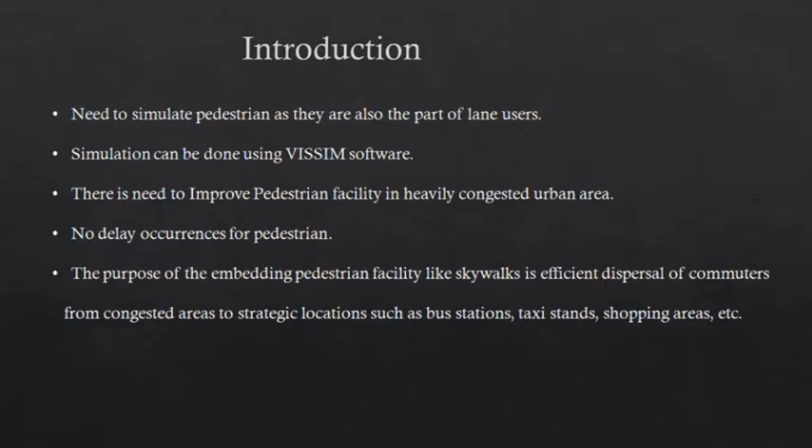Problem statement: I'll not consume much time. These are heavy congestions, and due to pedestrian and vehicle interaction, pedestrians feel anxiety while crossing from one lane to another. So considering all these situations, there must be some provision of pedestrian facilities.

Objectives are there, the same objectives.

Sir, can I skip all these? Go ahead, as you like. This is your presentation, we don't object. Whatever you want to do.

First, I carried out the feasibility study of pedestrian facilities in urban areas. After that, I collected data on traffic and pedestrians, including vehicle parameters and pedestrian parameters on the existing selected area, to analyze the delay occurring to pedestrians as well as vehicles, and to show the real life situation of vehicle and pedestrian interaction, and suggest remedial measures to reduce obstructions to pedestrians. All this was done with the VISSIM software.

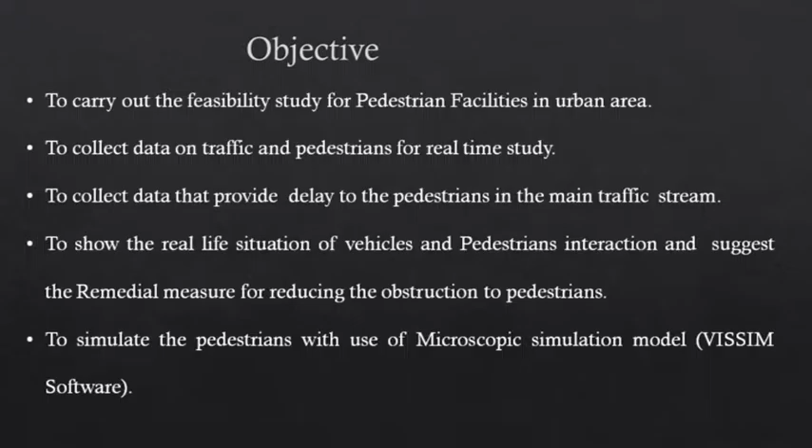I manipulated the real life data, the real scenario data, and collaborated it with the simulated data which I did in the VISSIM software. These are the scope: comparing the real life situation to the simulated one, and suggesting improvements for pedestrian facility and design based on the results obtained through simulation.

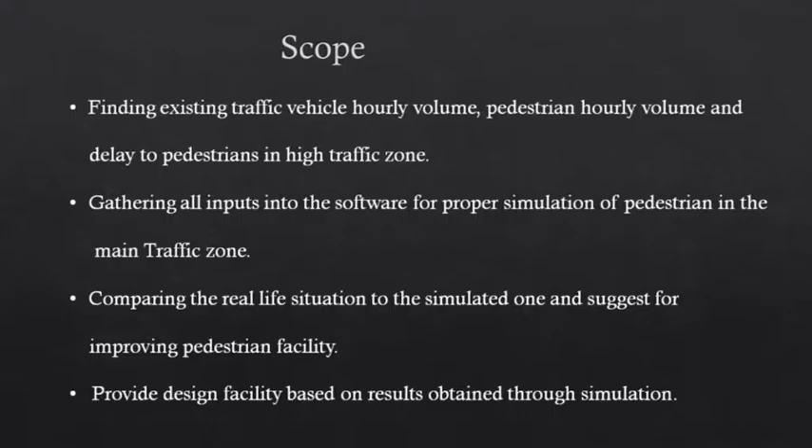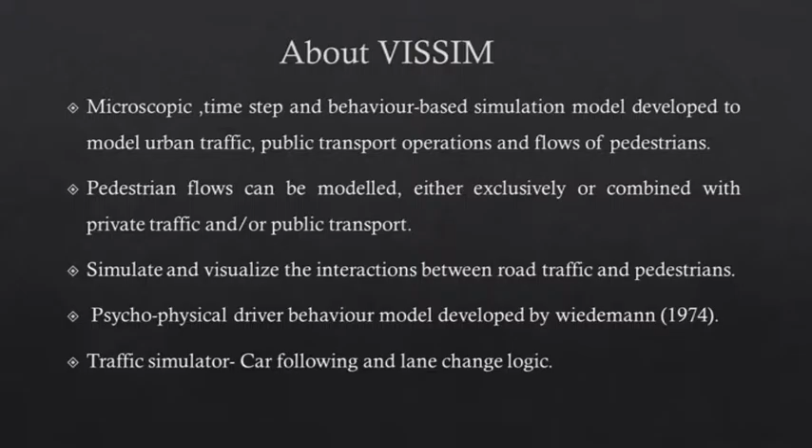This is what VISSIM is about. It is a kind of microscopic behavior-based simulation model which can model urban traffic or public transportation. That's what is discussed here.

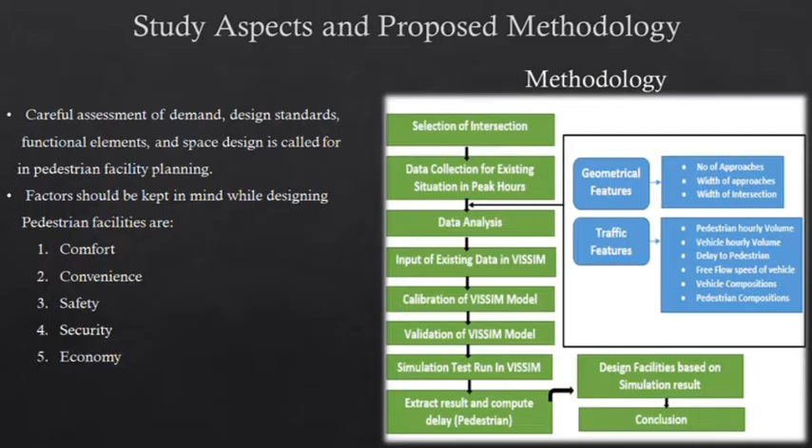Literature review. My methodology, I'm skipping the same. This methodology, I think, is the same procedure you carry out.

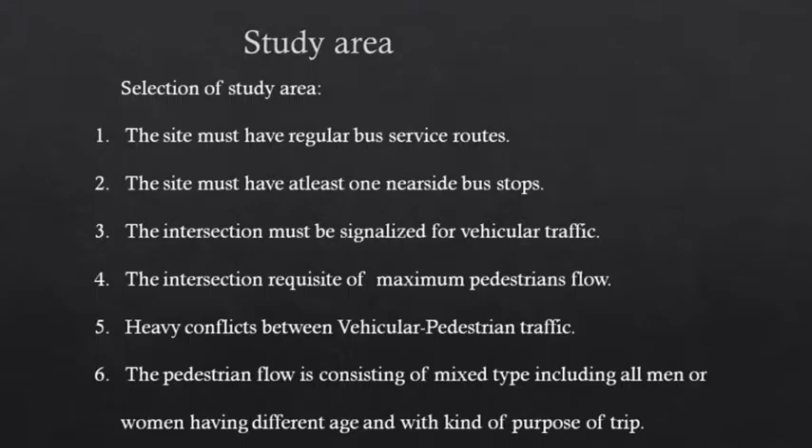My study area is like that: the site must have regular bus service routes, the site must have at least one nearside bus stops, the intersection must be signalized for vehicular traffic, the intersection must have maximum pedestrian flow, heavy conflicts between vehicular and pedestrian traffic, and pedestrian flow consisting of mixed types, including all men and women, all pedestrian types.

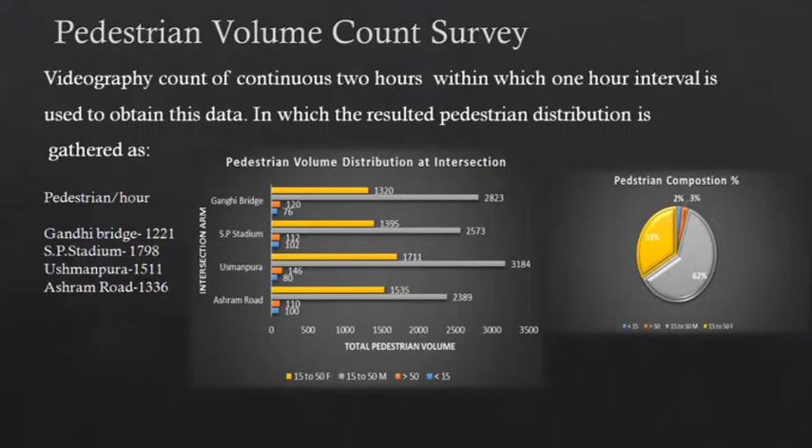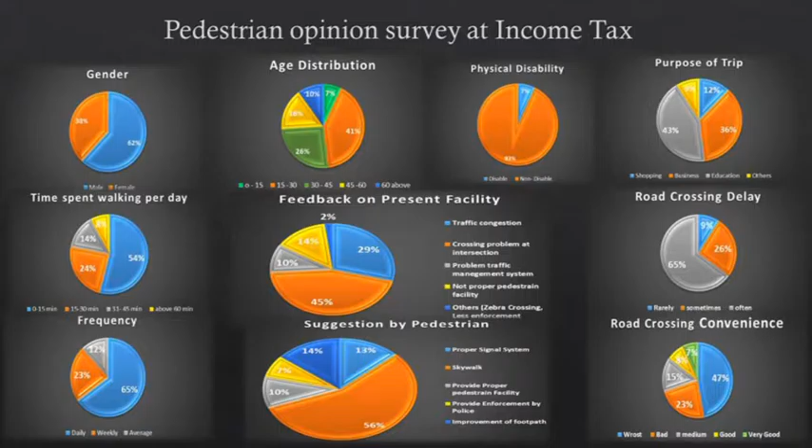This is another section which I studied, like Kalupur railway station. Everyone is aware of this. It is a kind of mid-block section.

In between, the pedestrians are crossing the lane. It is the biggest and busiest railway station within Gujarat, so the number of passengers using this area daily is associated with transport interchanges in their vicinity.

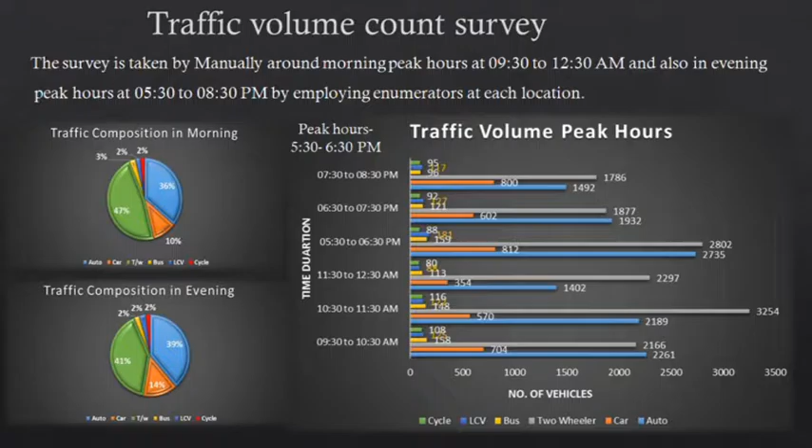The problem is further aggravated by the presence of hawkers and parked vehicles, making the commute hazardous for pedestrians. So for that I conducted surveys: traffic volume count survey, pedestrian volume count survey, road inventory, and the same approach field measurement.

After collection of that data, I went to the IRC provision. The same, Manraj sir has conveyed to us that two control sections of facility are there: at-grade pedestrian crossing and grade separated crossing. So here are some of what can be called warrants.

Peak hour volume of pedestrians: PV square is greater than 2 into 10 to the 8. According to my conducted survey, it is observed that 7.9 into 10 to the 11 is the frequency. So this one warrant is agreed.

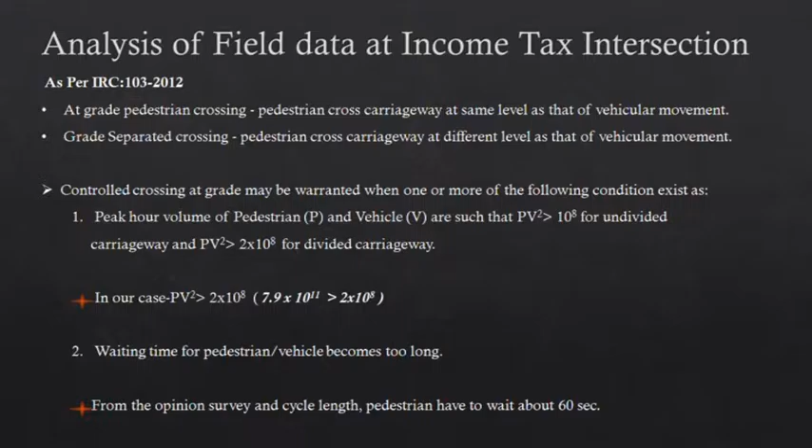Waiting time of pedestrian and vehicle becomes too long, same as I supposed to face. Accident records indicate 5 - this is the total provision in IRC 103/2012. From my past accident record, it is more than 5 injuries, and approach speed of vehicles exceeds 65 km/h.

Taking these two into consideration, the control measure usually adopted in this case is to provide a traffic signal with an exclusive pedestrian phase. So I have provided the pedestrian phase at the junction and also in the Kalupur mid-block junction.

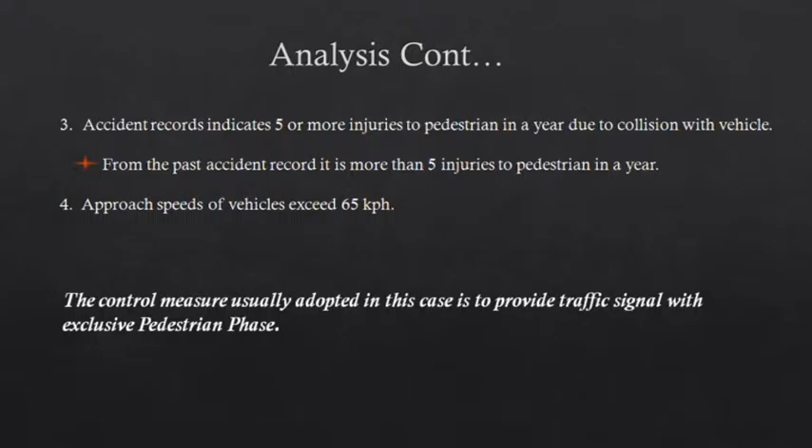That is what I calculated manually. This is the delay I found. This delay cost pedestrian unit flow is 22.08 pedestrians per minute.

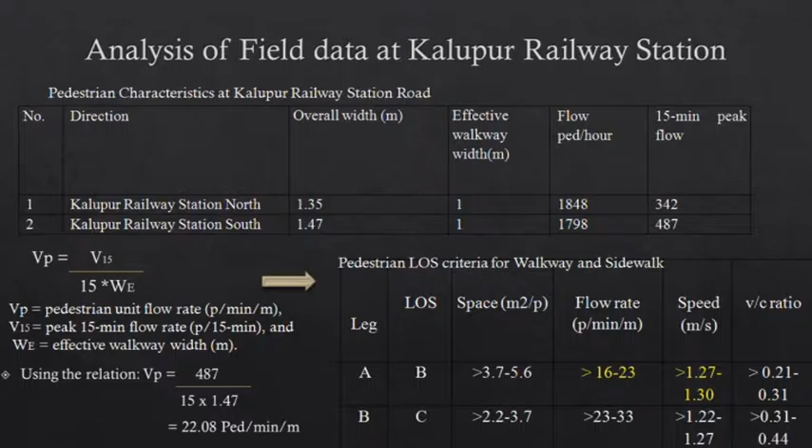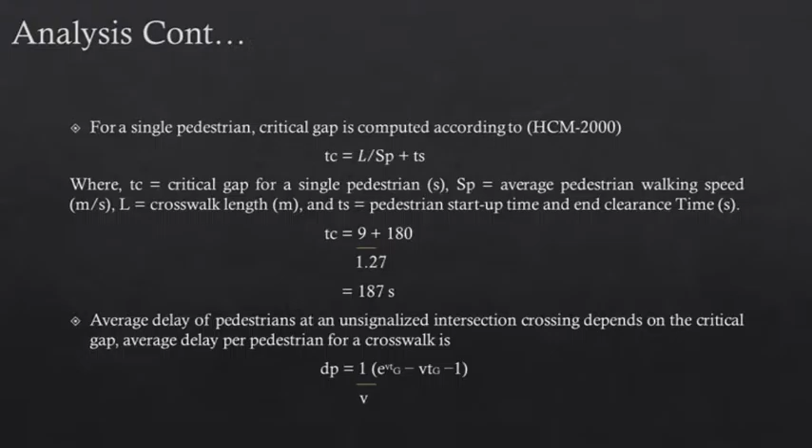This is the LOS criteria for walkway and sidewalk, which I went through. Finally I found manually the single pedestrian gap, that is 187 seconds. Same, what I got as level of service is F, which is very high.

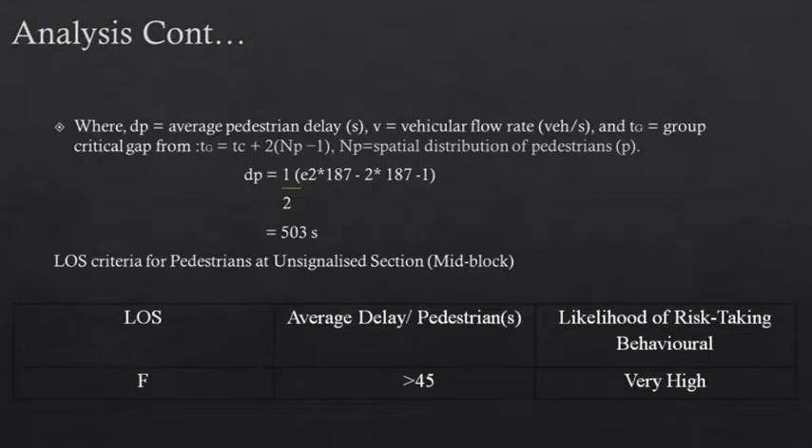So accordingly, I suggest that I modeled it in the simulation. This is an Income Tax intersection 2D, a glimpse of 2D, and this is a glimpse of 3D which I have modeled at the junction.

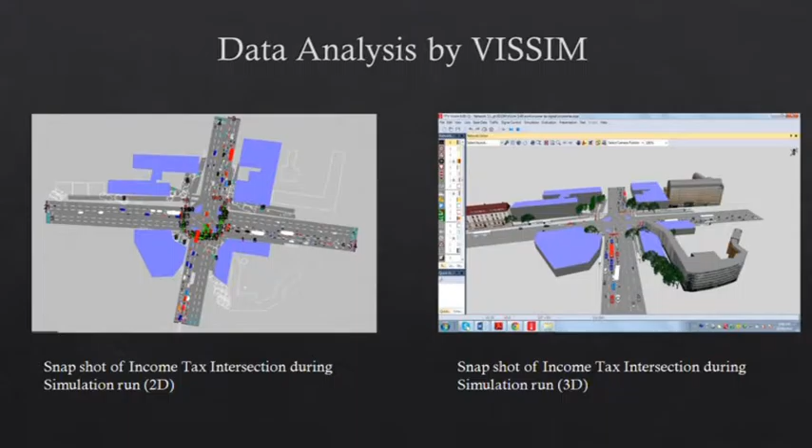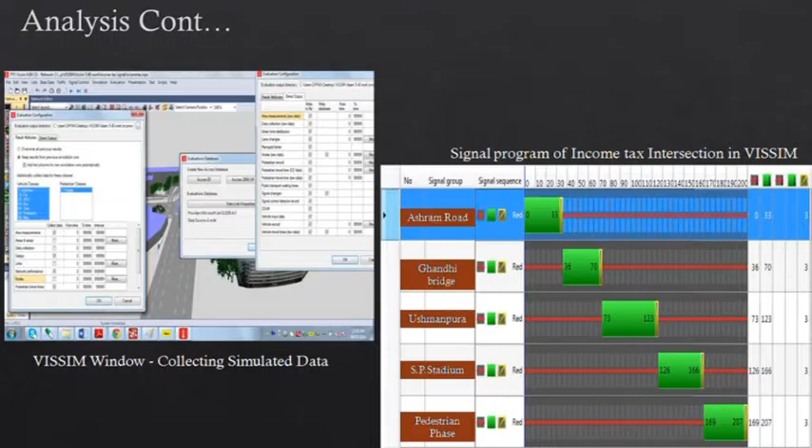This is one video, I'll show it. Will the video work?

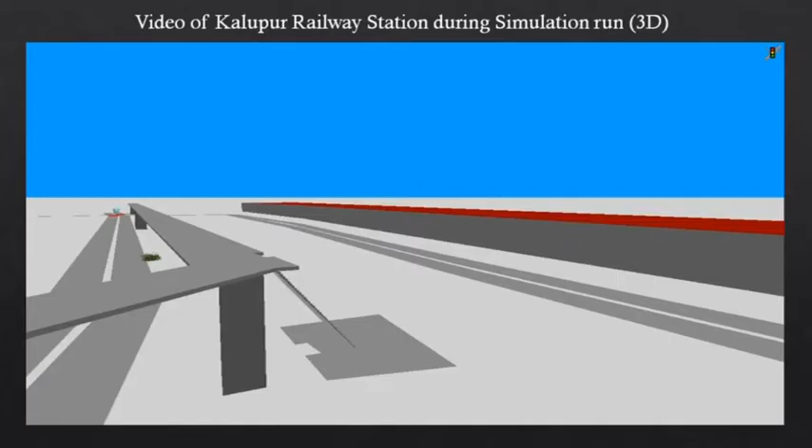My analysis shows that at Income Tax intersection, the actual delay, the real-time data delay, is 44 seconds, and after simulation it will go down to 36 seconds.

And at Kalupur junction, 503 seconds is the actual delay, and after simulating by providing a skywalk there, it becomes 0.8, which is a kind of negligible value.

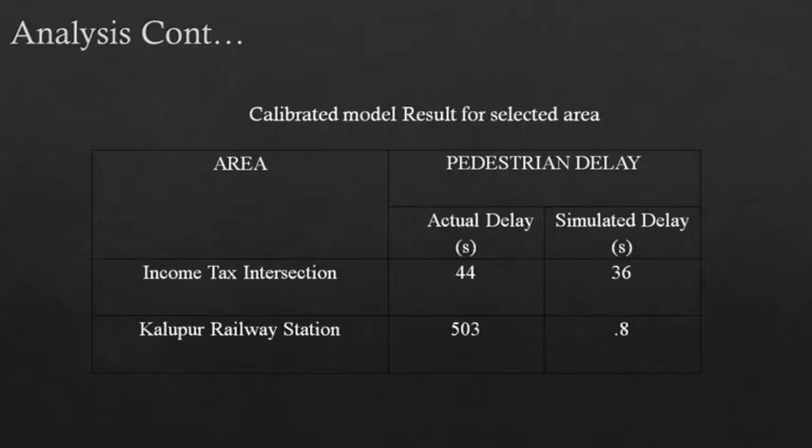So for that, I went through the warrants given in our codal provisions: that the volume of pedestrian and vehicular traffic is so large that insertion of an exclusive pedestrian phase will increase the cycle time for traffic signals beyond 120 seconds.

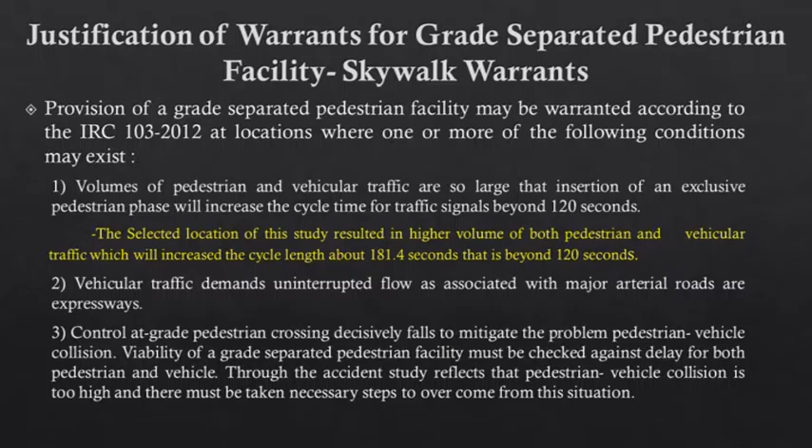In my data, the cycle length is about 181.4 seconds, which is very high even for vehicles. So I have prepared a skywalk for that, and accordingly given the design parameters.

These are the design parameters at the junction of the intersection. This is the run process after providing the skywalk at the junction.

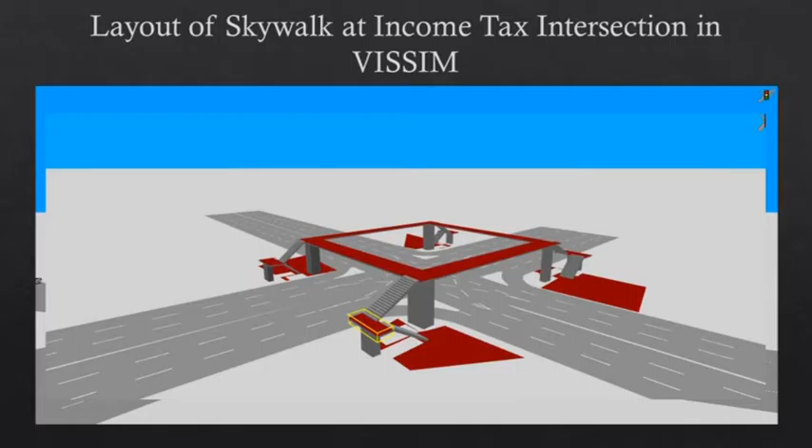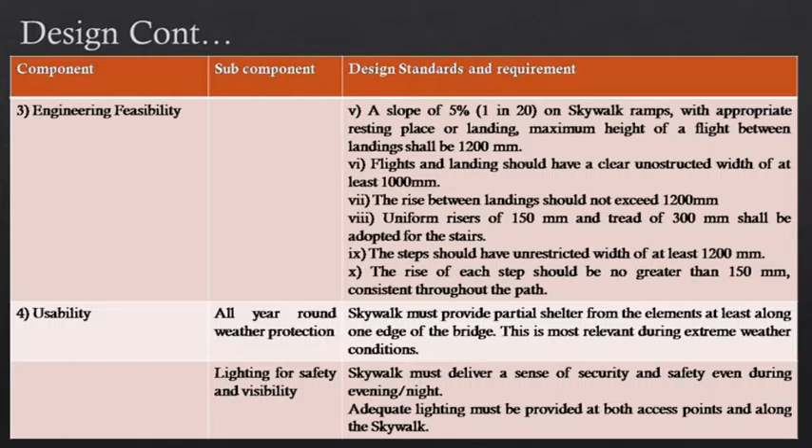Same for Kalupur railway station, I went through the justification for design criteria, like that.

Conclusions are the same: the study is concluded worthfully, and for the stretch of mid-block at Kalupur railway station, the simulation comes to 0.8 second, which is negligible, clearly representing that after providing a skywalk across Kalupur railway station, pedestrians will feel safe and convenient using this facility.

For Income Tax intersection, the average delay to pedestrians after simulation comes to 36 seconds, as discussed. After providing a separate signal phase for pedestrians, vehicular traffic has to wait for long periods.

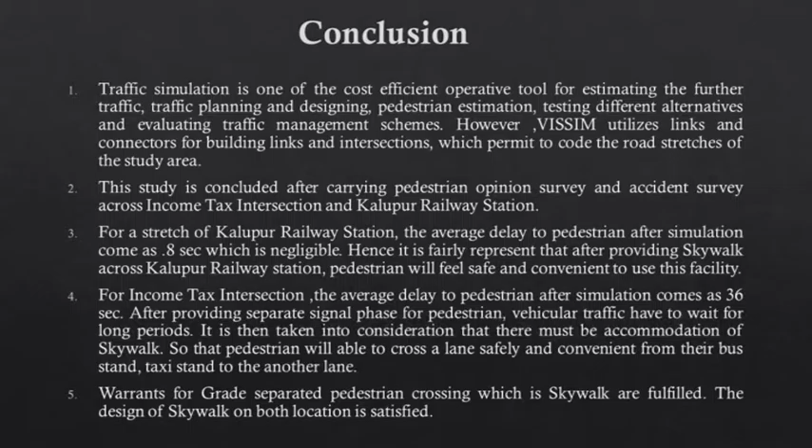Accordingly, taking that into consideration, it must be accommodated with a skywalk, so that pedestrians will be able to cross the lane safely and conveniently from the bus stand or prime locations. So the warrants for grade-separated pedestrian crossing, which is a skywalk, are fulfilled in my study.

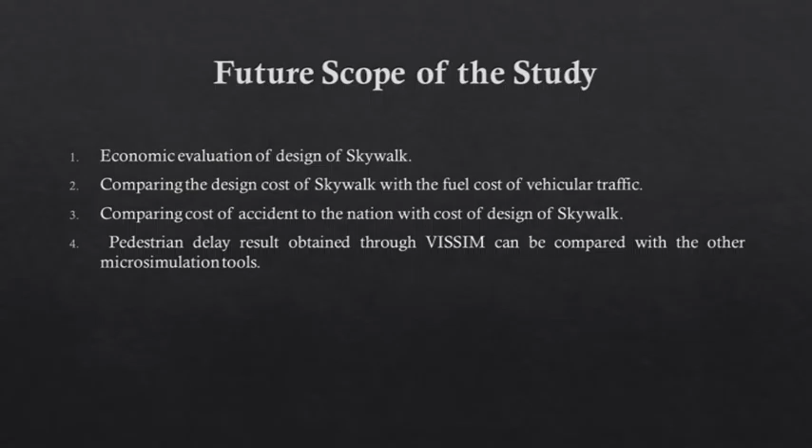This is the future scope of study: we can do another research work for the economic evaluation of the designed skywalk, comparing the design cost of the skywalk with the fuel cost of vehicular traffic, and comparing the cost of accidents to the nation with the cost of designing the skywalk.